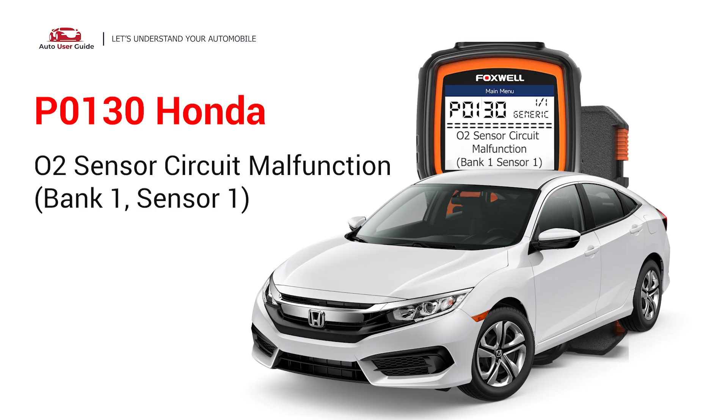This repair video for the P0130 error code is specifically tailored for Honda drivers. If your Honda is showing the P0130 code, this is for you.

This means that the engine control module (ECM) detects that the voltage from this specific O2 sensor is outside the normal operating range. Under this circumstance, short-distance driving is permitted, but your vehicle should be repaired as soon as possible.

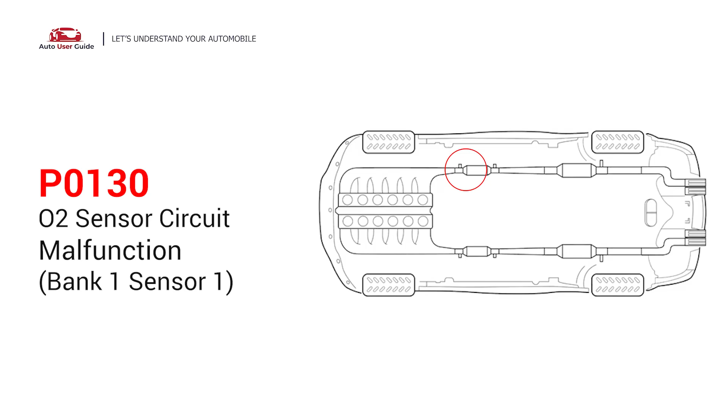So what causes this imbalance? Here are the most common culprits. This error could be caused by these possible faults in your car: faulty oxygen sensor, wiring issues, exhaust leaks, fuel system problems, or engine mechanical issues.

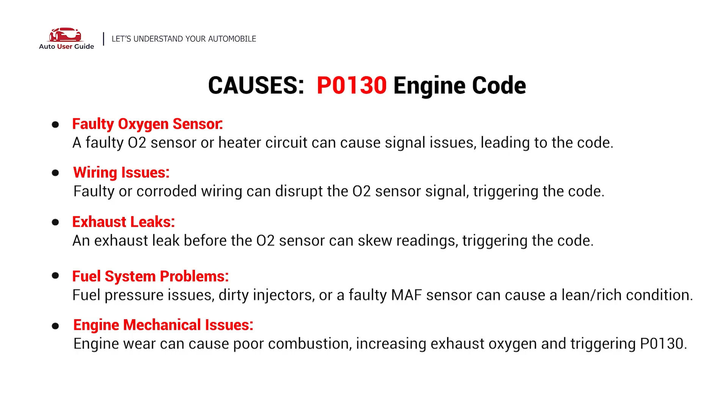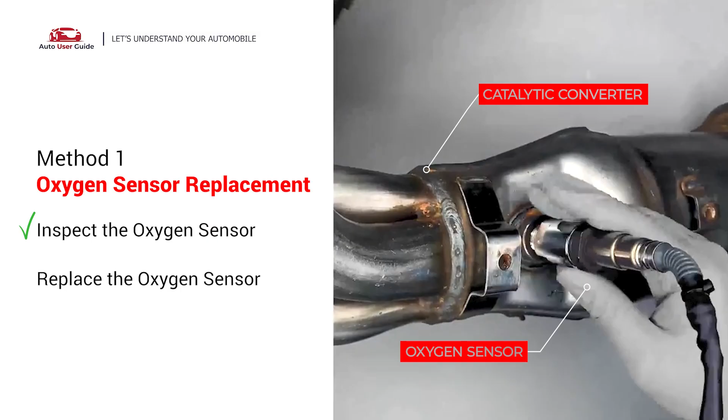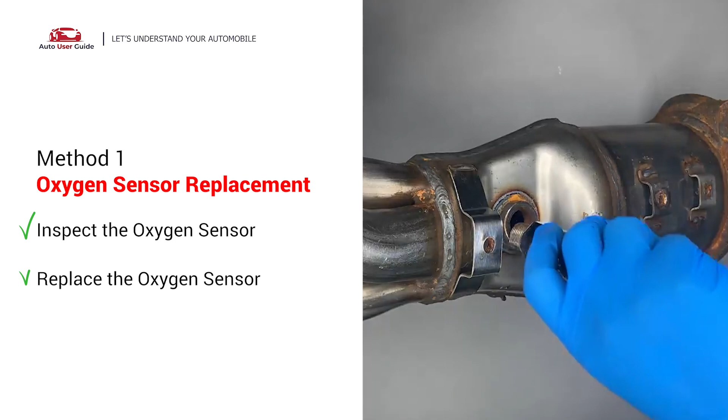Here are 3 simple DIY methods you can try to solve this problem. First, oxygen sensor replacement: carefully remove the oxygen sensor from the catalytic converter and visually check the oxygen sensor electrical connections, wire harness, and metal tabs for any damage. If damage is found, replace the oxygen sensor.

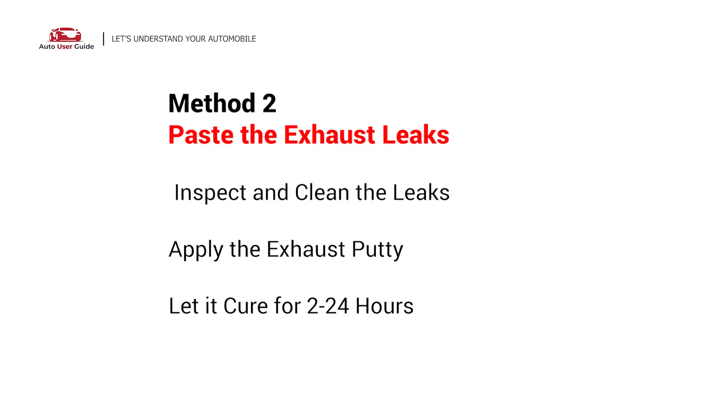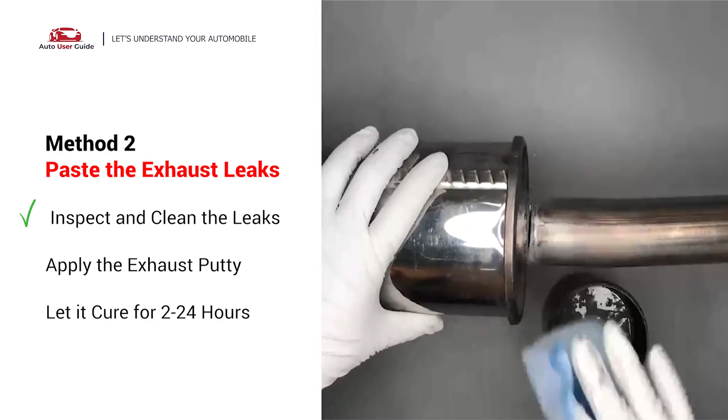Next, paste the exhaust leaks. If you have a leak around the corner, get some exhaust putty to seal it up. First, get sandpaper and a wet wipe to clean the leaking area for better application. Stir the paste well to activate it, then apply and press the paste to seal the leaking area. After application, don't start the engine, because the positive pressure from the exhaust will blow out the paste. Let it cure for 2 to 24 hours, depending on the external temperature.

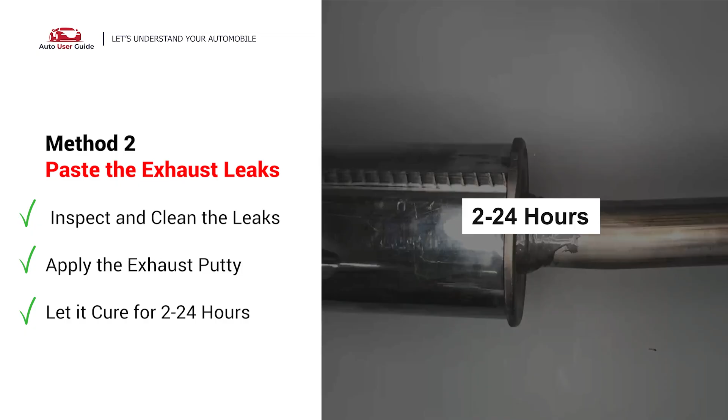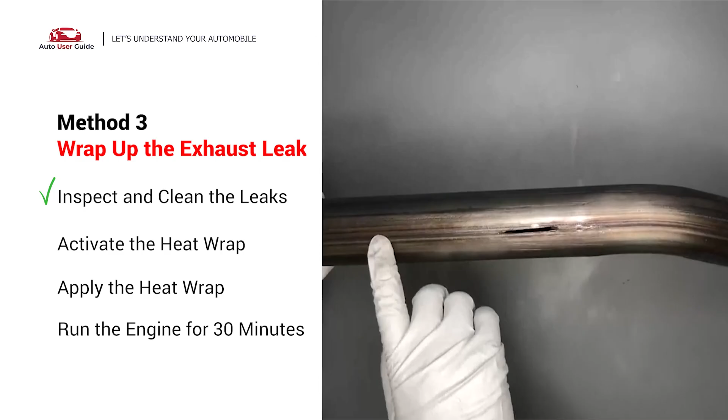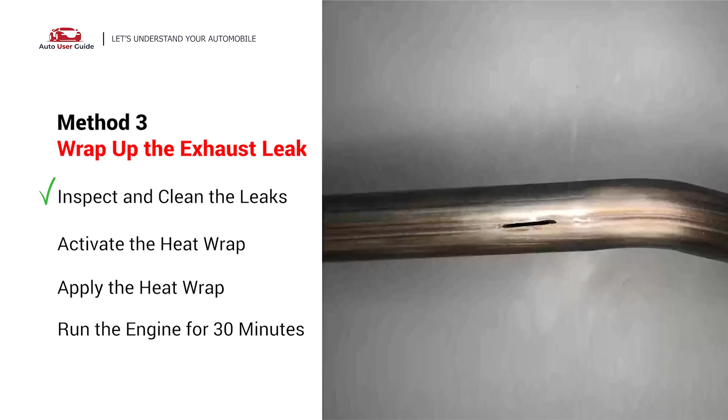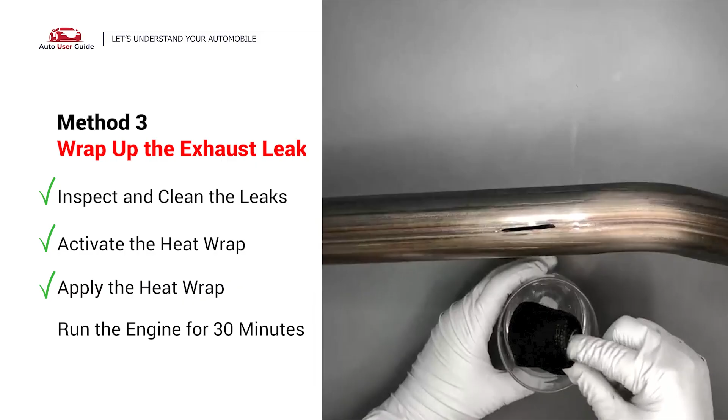Wrap up the exhaust leaks. Exhaust pipes are made out of rolled steel, and there is a welded seam on them. Like this one, the seam will often rot and leak. First, get sandpaper and a wet wipe to clean the leaking area for better application. Get the heat wrap out and put it into water for about 40 to 50 seconds to start the activation process. Then remove it and squeeze out any excess water. Wrap it around the area and overlap it a couple of inches on each side. Repeat the process 3 or 4 times, then squeeze it to make the resin go all through it. Start the car and let it run for 30 minutes so the heat cures it and makes a permanent fix.